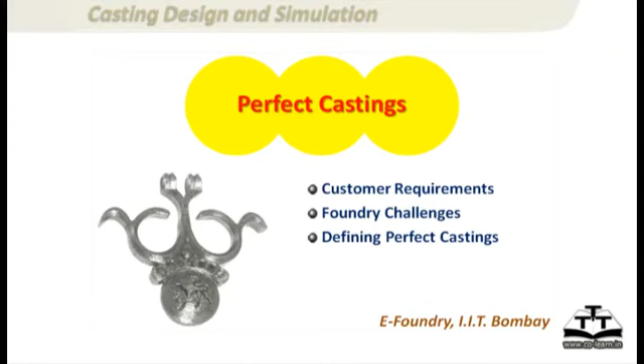So let us start with the requirements of the OEMs or original equipment manufacturers. As you know, there is an increasing trend now to reduce cost, and they try to achieve that by reducing the weight. Now you can do that in two ways. One is you can reduce the wall thickness, make the walls more thin. Second is they can use sophisticated tools to optimize the shape of the casting. So shapes are getting more complex, the walls are getting thinner, and this of course puts some kind of a challenge on the foundries.

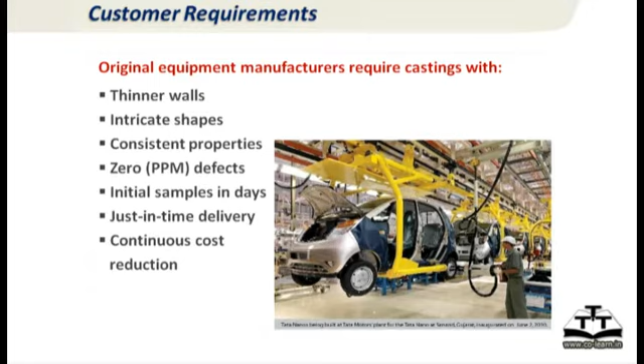The second group of requirements is about quality, and it's not just to make sure that the internal quality is free of any defects, but also they want consistent quality and consistent properties, and that's much more difficult to achieve. The third is about time. Not only do customers want the initial samples fast, which used to take weeks and months and now they want in days, but secondly once a sample is approved they want the regular production to happen just in time: the shop number, the gate number, time and date is given and it has to be delivered at that point of time.

Last but not the least, they also need continuous cost reduction. Initial quotation can be fine, but they expect some percentage reduction year after year after year. So these are the things which customers expect from their suppliers.

Now from the foundry's point of view, they need to meet these challenges. The biggest challenge is about quality or rejections. We know that even in production foundries the rejections can be as high as 2 to 3%, 5%, but if it's a jobbing foundry, rejections can be as high as 5, 10, maybe even more, 15, 20%. So this is priority number one.

Number two is, once they conquer the quality demon, you can say, the next bigger challenge is to achieve good yield. In a large thick steel casting, yield can be as low as 50%, which means you are melting 2 tons of metal to produce 1 ton of good castings. Now this has to be improved because yield directly affects the energy consumption and therefore the cost of the castings.

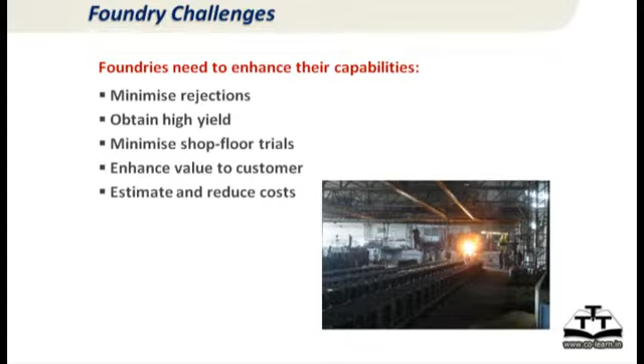Now to meet these requirements of OEMs, foundries do take up a lot of pressures. The two pressures you see right away are from the customer and from the competition.

Now customers, as you've seen, require quality assurance, they require reliable delivery, initial samples fast, reliable on-time, just-in-time delivery of production parts, and they want continuous cost reduction. And at the end of that, you cannot say that the customer will buy from the same foundry; the moment they find some other foundry who can meet all these criteria at a lower cost, they'll shift to him. So foundries can never be guaranteed business from a particular customer.

Now competition is always eating someone else's lunch, so we have competition not only from within the country or within the cluster, but from different parts and different countries. If they can give better cost, better value, quality or delivery, they can always get the loyalty of a customer shifted to themselves. So these are the two pressures coming on foundries from the customers and competitors.

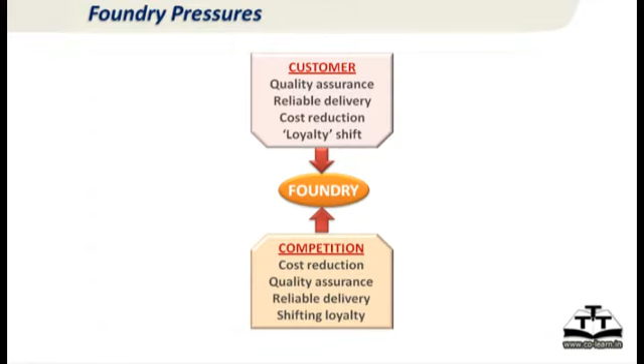But there are two other pressures coming in. One is from the resource crunch. Increasingly foundries all over the world, not just in India and China, are facing the problem of skilled manpower. Not just manpower on the shop floor, but also manpower to do methoding, to do analysis, to look at quality. There is a big crunch of manpower there.

Second thing is materials no longer have a steady supply as they used to earlier. As you can see in the last few months and years, with the fluctuation in rates and shifting of suppliers and quantities, it's become a big problem for foundries to maintain a steady supply of incoming raw materials. Energy is becoming an issue in many parts of the country, especially in India. Recently we have many pockets of the country where power cuts are affecting foundries, and they're either forced to go for in-house generation or cut production, which is an issue.

And finally, technology by itself is an issue, because, let's say, highly automated molding machines or simulation technology, which we'll see later, are expensive, and they require resources, not just hardware but also manpower to run these things properly.

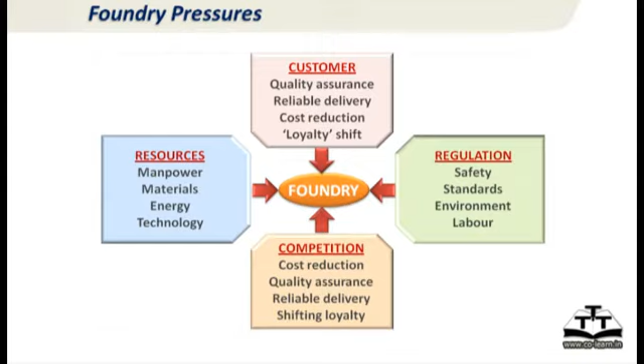On the regulation or government side, you have other pressures coming in. Foundries are required to meet certain safety norms, certain standards in terms of working environment and so on. Not only the internal environment but also the effect on the external environment in terms of pollution: solid, liquid or gaseous effluents, and also noise pollution. And we also have our own labor regulations. So these have to be met, and foundries are finding it increasingly difficult to meet these challenges and still offer castings at the right value point.

Okay, so let's see a scenario in a typical foundry, how they develop a casting, what challenges they come across and what issues they need to address at each stage. Let's say in a particular week, a foundry gets 8 inquiries from potential customers. The first thing they need to do is prepare a quotation, and maybe they find out of 8 inquiries, 2 are outside their sphere of capabilities. Maybe the material is not matched, or maybe they want very thin walls which they can't make with their own process. So let's say they prepare only 6 quotations and send them to the customers.

Now the key here is speed. Literally the person who sends an initial good quote has a big advantage in terms of perception in the eyes of the customer that yes, these guys are capable of doing things fast, in time. So speed is the key when you convert from inquiry to quotation.

The next step is from quotation you need to start looking at tooling. Let's say out of 6 quotations you got 4 orders for sample castings, maybe because you don't want to take up the other 2 orders, or maybe you only got these 4 orders. So you prepare the tooling for them, the patterns and core boxes and so on.

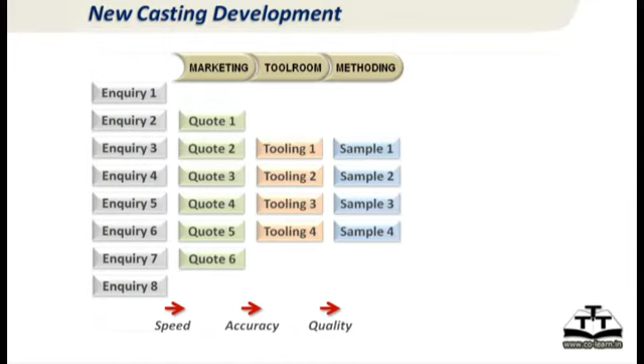Okay, and let's say you have now 4 samples ready, and here of course the issue is, can you get the quality right? Is it free of internal defects, and is the shape okay, are the properties okay? And if you can meet this challenge, and let's say the samples are now sent to the customer, maybe the customer gets samples from other places and maybe he chooses some other suppliers for some parts. So maybe you finally get 2 orders out of the 8 that you initially got the inquiries for.

And once the regular order starts, the key issue is reliable on-time delivery. Maintain the quality, but make sure deliveries are on time, right place, right time. So let's say these 2 orders you start supplying, and then end of the year when you balance your books, you find that for one part you made a profit, another part maybe you just about broke even or maybe even made a loss.

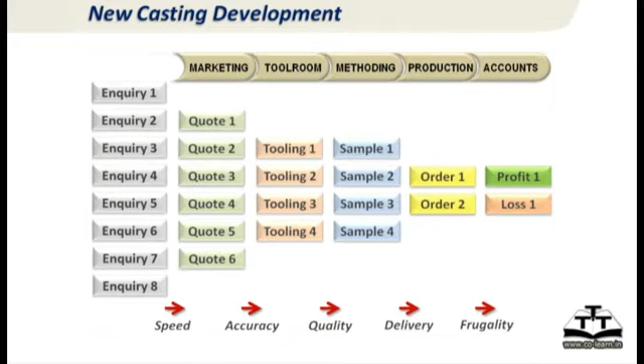So here the issue is, have you been frugal enough in the manufacturing systems that our costs are minimum and there is sufficient margin to make sure there is a profit and not a loss? So these are the basic scenario or environment in which a foundry operates. Next we move towards the so-called perfection or perfect casting. How do you define that?

So to start doing that, we first talk about conformance and conformance criteria. We look at three major groups of conformance criteria. The first one is geometry, and that's fairly well understood because you're talking about getting the shape and dimensions right, and this is essentially affected by the tooling design, the pattern and core boxes.

The second conformance, which foundries are very well aware of and handle pretty well, is integrity or internal soundness. Is the casting inherently free of internal defects like cavities and porosity and cracks and hot tears? That is integrity or soundness. And this is affected by three steps in the casting process: making of the cavity, melting and pouring the metal, and finally letting it solidify in controlled conditions. These three events affect the integrity of a casting.

The last one, which is now becoming more and more important, is properties, especially mechanical properties like tensile strength and hardness and fracture toughness. Now these are a function of the composition of the cast metal, but it is more than that. It is not just composition but also composition interacting with the mold material and the process parameters to give you a certain microstructure which affects properties. So these are the conformance criteria.

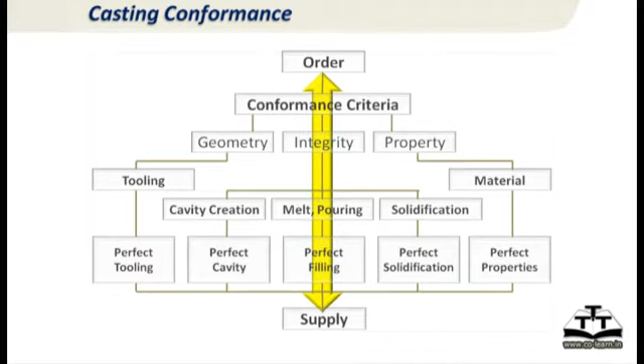Now how do we achieve them in a foundry? Theoretically we can do it by creating a perfect tooling, perfect cavity of the mold, perfect filling, perfect feeding, and finally getting perfect properties. That is from the supply side. Ideal conformance means the order and supply are in close match with each other. That's when we say that the conformance is very high. That is the goal of perfect castings. But let's go beyond that.

What we defined so far is a goal from the customer's point of view. So when you say perfect casting and conformance to the specified requirements of the customer, which essentially means that what I supply, the manufactured part, is very close to or same as the specified or desired part by the customer. But we need to look at the other side of the coin. The perfection has two sides. The other side is from the foundry's point of view.

Here we say, is there a compatibility between what they have to make and what they can make? In other words, between the part design requirements and the process capabilities, is there a good compatibility? If the process is not capable of meeting those requirements of the customer, then inherently there is a gap, and it's very difficult to bridge the gap. So perfect casting means you want to get the right quality at as low cost as possible from the foundry's point of view.

In theory it sounds okay, but in practice what we need to do is define the limits or the deviation which will be acceptable to say that a particular casting is perfect. What I mean by that is, say, the dimensional deviation between the original drawing and the final as-cast part.

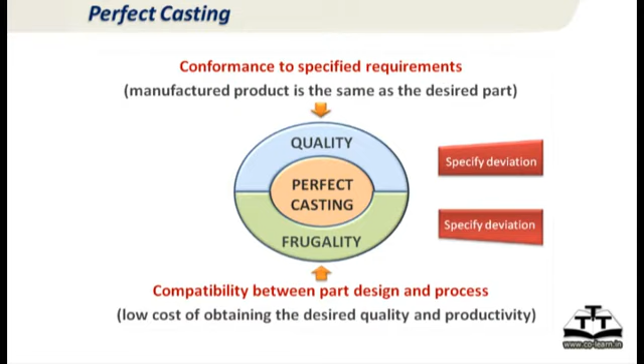If it's, let's say, plus minus 1 millimeter or 1% of the original drawings, we say it can still be counted as perfect. Similarly on the cost side or on the manufacturing yield side, a foundry may say if the maximum yield I can get is 85%, and I get 80 to 85%, it is okay from a capability point of view. So we need to define those limits within which we can declare that a particular casting or its manufacture is perfect.

How do we go about doing this whole thing? We are trying to lay down the broad framework in which we can create theories, principles, rules and eventually software programs which will help casting engineers design perfect castings. To start with, from the production point of view, a cast part is defined in terms of three elements: if the quality is right, if the total cost is okay, and productivity is as desired.

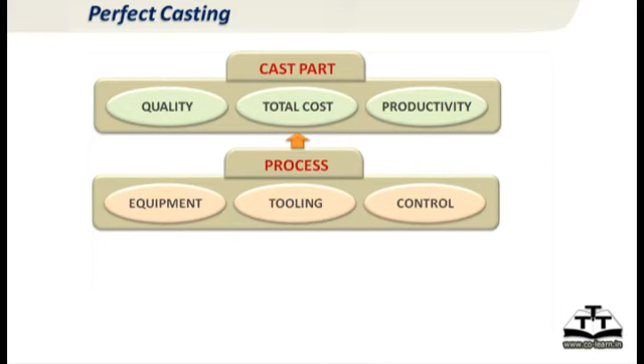Now these three depend on the process. Quality, cost and productivity are the final outcome of a perfect casting, but that is achieved by going one step lower, which is getting the process right. How do you get a process right? I select the right equipment, I make sure my tooling is right, I make sure my process controls are good. There is no point having great equipment if control is completely out of order. But how do we make sure that these are okay and compatible?

So I need to go back and look at my part design. If my part material is steel, I can make it only by, let us say, sand casting or investment casting. If it is a thin wall steel casting, I need to go for investment casting. So material, geometry and the tolerances, not only on dimensions but also on quality, define a process, and the process defines my final outcome.

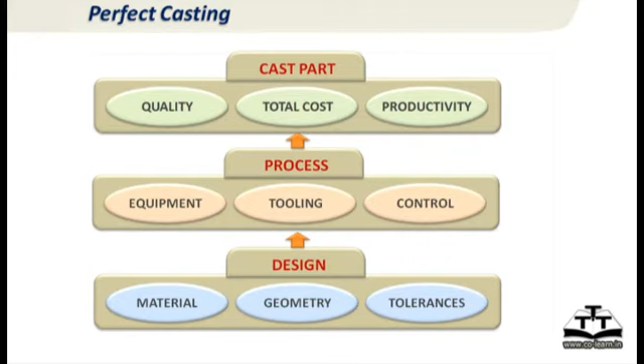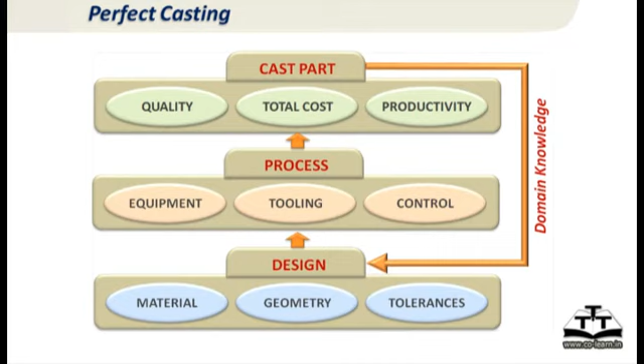If this whole chain of knowledge can be accumulated, learnt and transmitted, we are in good shape. That is possible by a continuous feedback loop where data or knowledge from whatever is produced in a foundry is captured and fed back to designers. Next time they design an investment cast steel part, they know that wall thickness cannot be below, let us say, 0.8 millimeters for a length of 2 or 3 centimeters. Then it will be inherently good quality. If they break that, we are setting it up for poor quality. This knowledge base helps develop the whole framework for perfect castings.

So to summarize, what we have learnt in this lesson is that the expectations of OEMs, original equipment manufacturers, for foundries are continuously increasing in terms of quality, deliverability, cost and other aspects. But foundries are challenged by several pressures as well as a process which is inherently complex because of a large number of parameters and their interactions. So it is not easy to meet those requirements, and on top of that they face a crunch in getting the right materials, manpower or resources like energy.

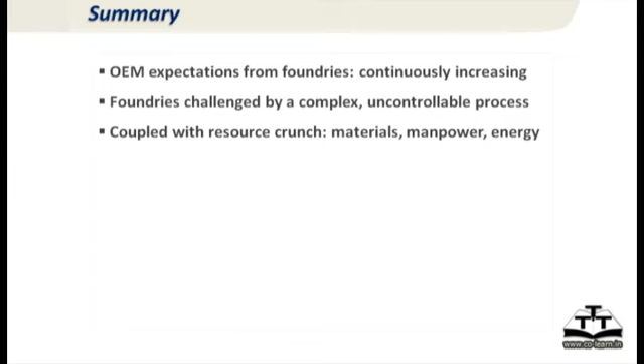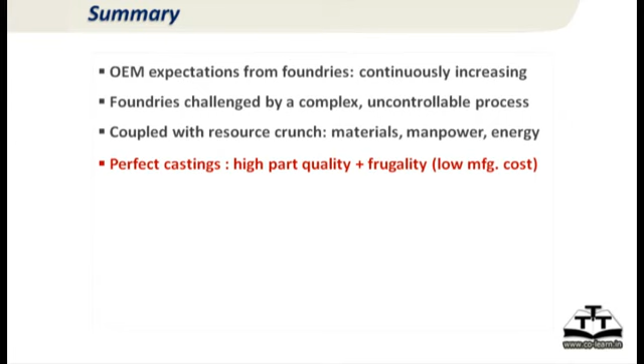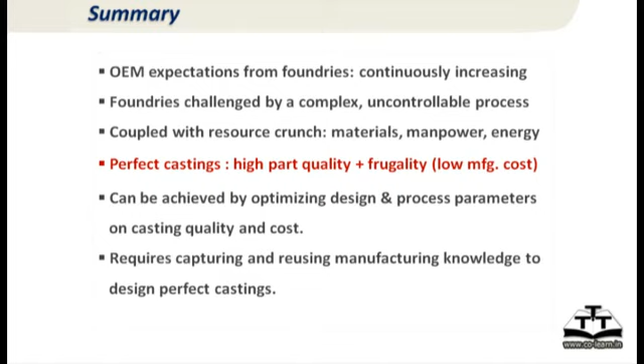So in this scenario we can define perfect castings as ones where you get fairly high quality as desired by the customer at fairly low cost as desired by the suppliers. How do we achieve that? By good optimization of the design parameters, which leads to selection of the right process and right equipment, and therefore a good outcome. All this requires continuous capture and reuse of knowledge.

In this course we are going to show you some of the knowledge elements which we have captured so far and how to use them for what we defined as perfect cavity creation, perfect filling and perfect feeding of the castings. So we will stop here.